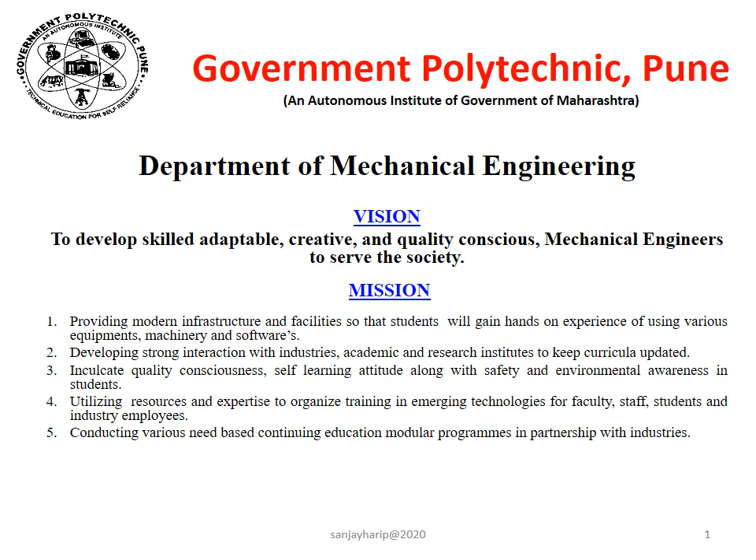We have studied up till now the design of simple components. Today we are going to study an important topic, that is design of shaft. In this topic we have to achieve the course outcome, that is design power transmission elements like shafts, keys and couplings.

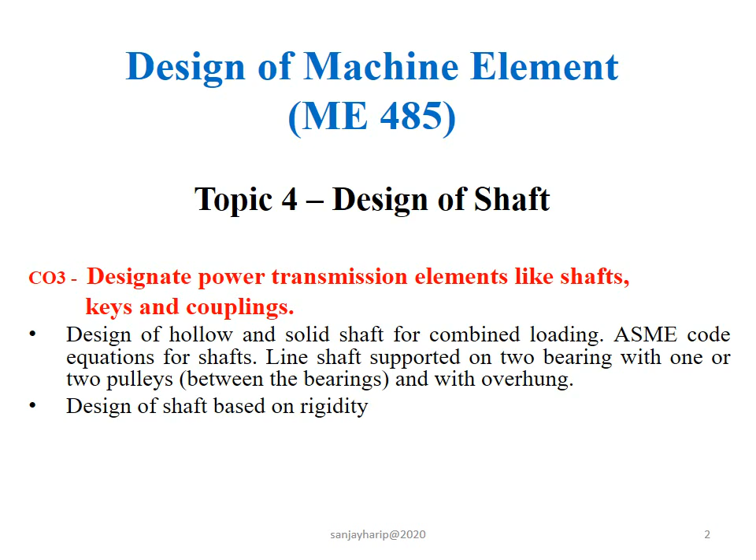A shaft is a rotating machine element which is used to transmit power from one place to another. The power is delivered to the shaft by some force and the resultant torque or twisting moment set up within the shaft permits the power to be transferred to various machines linked up to the shaft.

In order to transfer the power from one shaft to another, various members such as pulleys, gears, etc. are mounted on it. These members, along with the forces exerted upon them, cause the shaft to bend. In other words, we may say that a shaft is used for the transmission of torque and bending moment. The various members are mounted on the shaft by means of keys and splines.

There are different elements like axles and spindles. The shafts are usually cylindrical but may be square or cross-shaped in section. They are solid in cross-section, but sometimes hollow shafts are also being used.

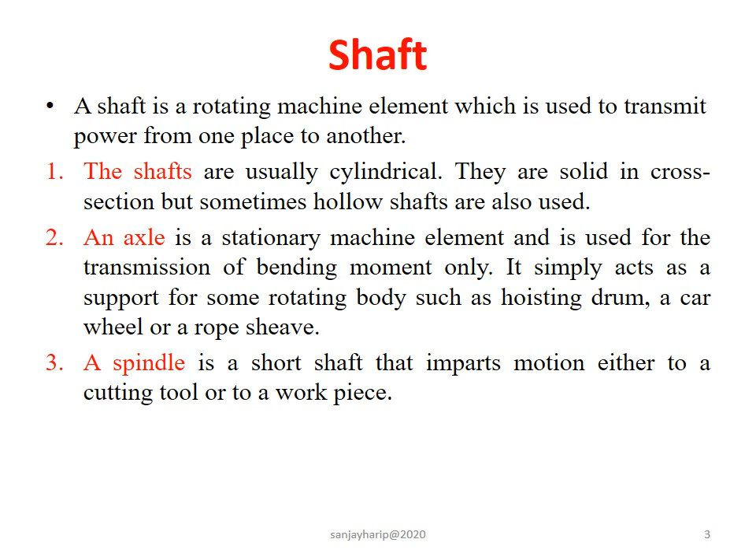There are two types of shafts which are important from the design of machine element point of view. First, transmission shaft. This shaft transmits the power between the source and the machine absorbing power. Counter shafts, line shafts, overhead shafts and all factory shafts are transmission shafts. These shafts carry machine parts such as pulleys, gears, etc. Therefore, they are subjected to bending in addition to twisting.

Second, that is machine shaft. These shafts form an integral part of the machine itself. For example, the crankshaft is the best example of a machine shaft.

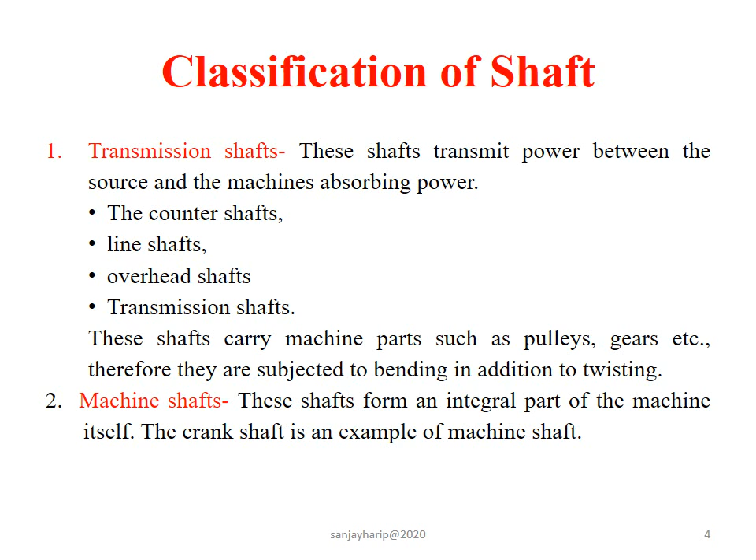Shafts may be designed on the basis of strength and rigidity. In designing a shaft on the basis of strength, the following cases may be considered. First, shaft subjected to twisting moment or torque only. Second, shaft subjected to bending moment only. And third, shaft subjected to combined twisting and bending moment. Let us see the first condition, that is shaft subjected to twisting moment.

When the shaft is subjected to a twisting moment only, then the diameter of the shaft may be obtained by using the torsion equation, which we have studied in strength of materials. This equation is T/J = τ/R = Gθ/L, where T is the twisting moment, J is the polar moment of inertia, τ is the torsional shear stress, R is the distance from the neutral axis, D the diameter of shaft, G the modulus of rigidity, θ the angle of twist, and L the length of shaft.

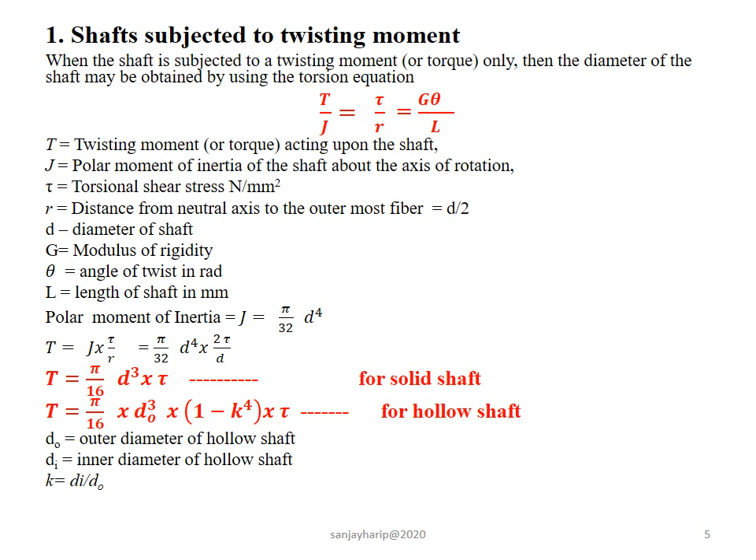So we can easily find out the diameter of a solid shaft by using the equation T = π/16 × d³ × τ. Whereas for a hollow shaft, the torque T = π/16 × do³ × (1 − k⁴) × τ, where k is the ratio of the inner diameter of the hollow shaft to the outer diameter of the hollow shaft.

Let us see another condition, that is shaft subjected to bending moment only. When the shaft is subjected to bending moment only, then we may use the bending equation, that is M/I = σb/y, where M is the bending moment, I is the moment of inertia of the cross-sectional area of the shaft, σb is the bending stress, and y is the distance from the neutral axis to the outermost fiber.

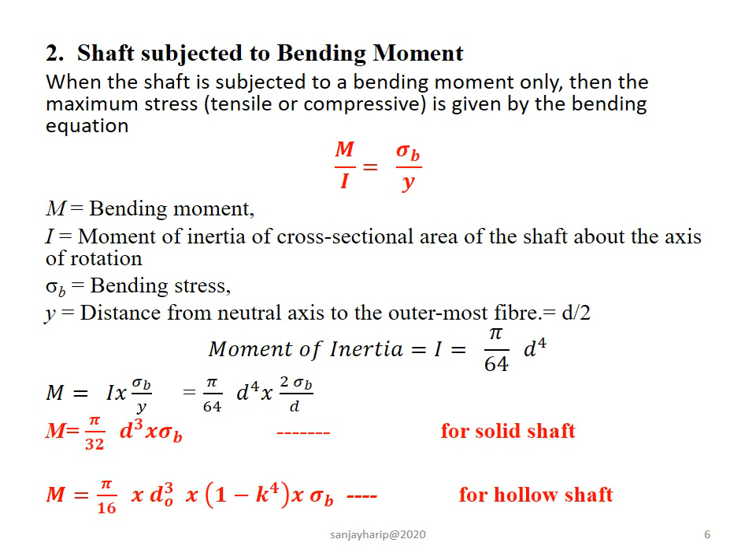Therefore, we can easily determine the diameter of a solid shaft using the equation M = π/32 × d³ × σb. Similarly, for a hollow shaft, M = π/32 × do³ × (1 − k⁴) × σb, where k is the ratio of the inside diameter of the hollow shaft to the outside diameter of the hollow shaft.

Let us see the third condition, where the shaft is subjected to combined twisting and bending moment. When the shaft is subjected to combined twisting moment and bending moment, then the shaft must be designed on the basis of the two moments simultaneously. Various theories have been suggested to account for the elastic failure of the material when subjected to various types of combined stresses. The following two theories are important from the design of shaft point of view, which we have already covered in topic number 1.

One, maximum shear stress theory, known as Guest's theory. This theory is generally used for ductile materials such as mild steel. And the second theory, maximum normal stress theory, also known as Rankine's theory. It is used for brittle materials such as cast iron. So as shown in the slide, we can obtain the diameter of the shaft when it is subjected to both twisting and bending moment for solid and hollow shafts.

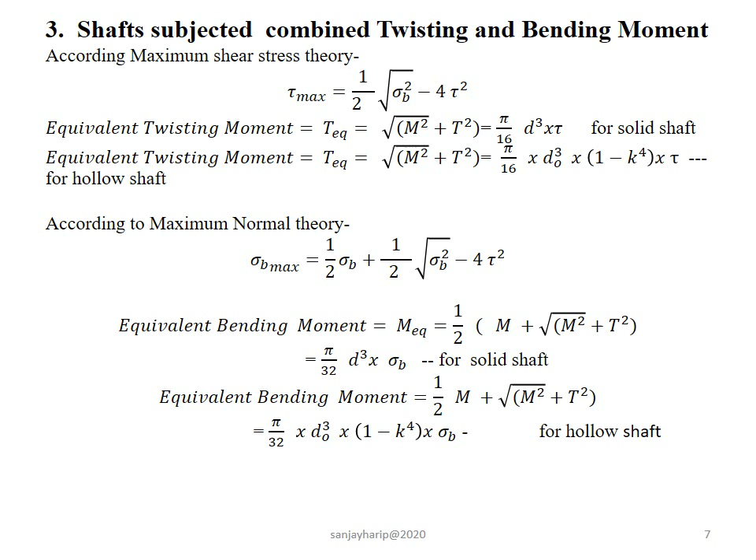Up till now, we have assumed that the shaft is subjected to constant torque and bending moment. But in actual practice, shafts are subjected to fluctuating torque and bending moment also. In order to design such shafts like line shafts or counter shafts, the combined shock and fatigue factor must be taken into account for the computed twisting moment and bending moment.

Therefore, when the shaft is subjected to combined bending and torsion, we can determine the equivalent torque, which is equal to √((Km × M)² + (Kt × T)²), where Km is the combined shock and fatigue factor applied to bending, and Kt is the combined shock and fatigue factor applied to twisting moment. So what are these Km and Kt? Km and Kt were suggested by ASME, the American Society of Mechanical Engineers, to account for shock and fatigue while designing shafts.